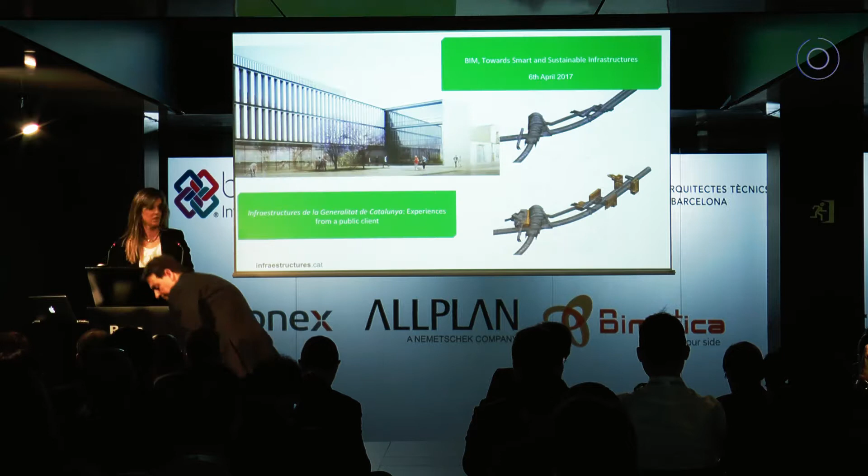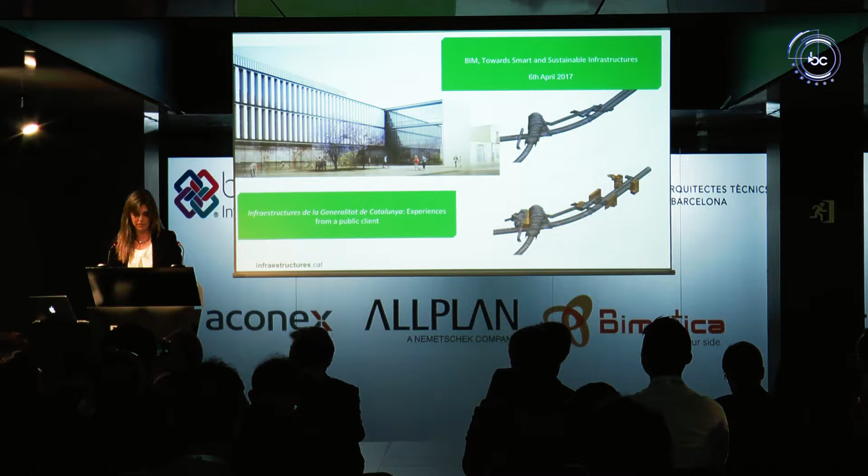From the first stage, when we plan the infrastructure, to the last one, when these infrastructures are handed over. For this reason, in the last years, we have started to investigate and study all kinds of collaborative methods to introduce in our daily management.

Before starting, I would like to tell you more about Infraestructuras and what we do. It's important to understand how we want to introduce BIM in our company.

Infraestructuras is a public company created in 1990, depending on the government of Catalonia. We are responsible for the planning, building, preserving, maintaining, and operating all kinds of infrastructures and buildings.

This is why we are involved in the whole process, from the planning to the maintenance of these infrastructures. In order to achieve our mission, we need to be connected with the needs of society and also with the needs of most of the ministries.

Infraestructuras depends on the Ministry of Territory. However, we also work with other ministries. We focus on civil works, engineering, and infrastructures.

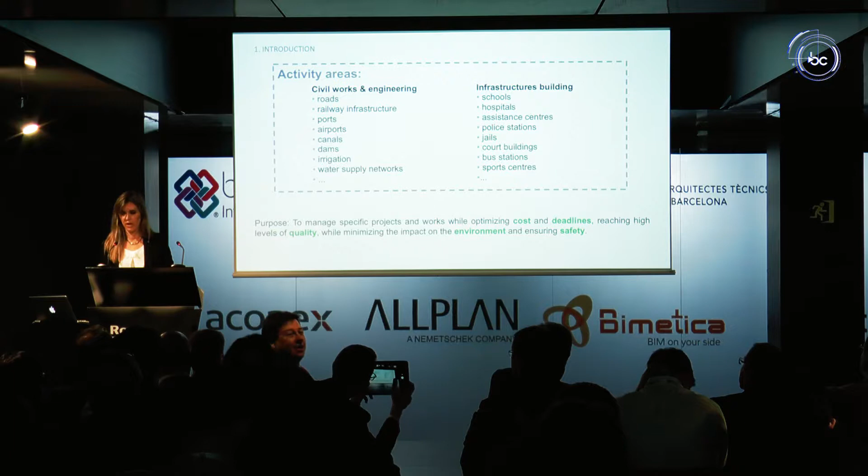Our purpose as a public company is to manage specific projects and works while optimizing costs and deadlines, reaching high levels of quality while minimizing the impact on the environment.

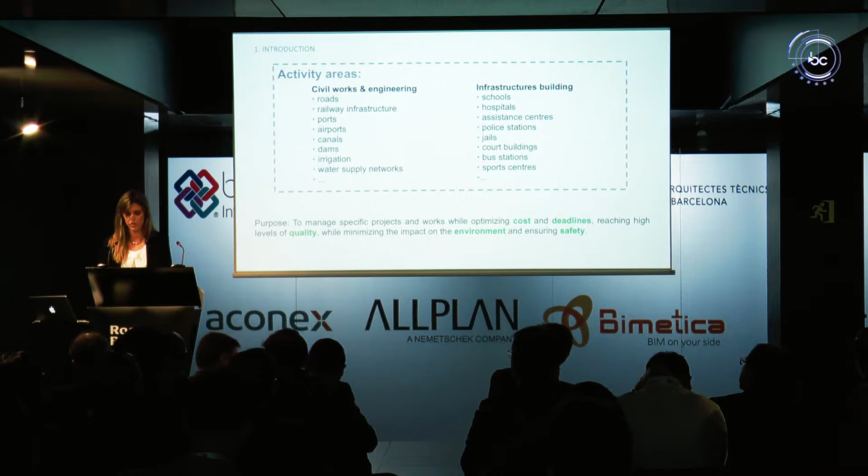And this is why Infraestructuras, for this purpose, decided to start introducing the BIM methodology 4 years ago. The main reasons why we wanted to introduce BIM in our company are the following.

Summarizing, we want to have the best information to plan, design, build, and maintain better works in a quicker and cheaper way.

But it's important now, where are we nowadays? In his speech, the territory minister already explained a little bit the first part, but I want to repeat

the key points. Last May, the government of Catalonia approved a governmental agreement in order to create a commission to introduce BIM methodology in public works.

The first challenge of this commission is to develop a white paper that establishes the global strategy in BIM for the government. This report has been commissioned to Construim el Futur.

Construim el Futur is a group formed by more than 40 company organizations that deal with the BIM implementation in Catalonia. Infraestructuras, my company, also belongs to this commission, as well as Construim el Futur.

My company's first great test experience started in 2013 with this school. It was our first test trial in design and later on in building.

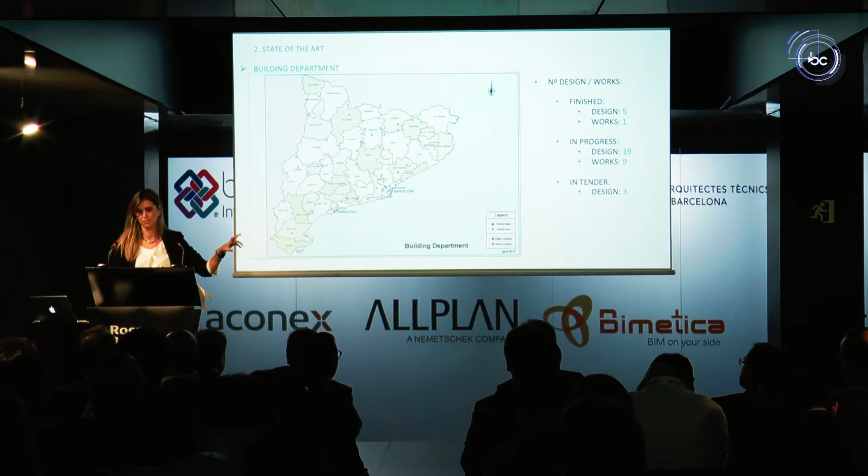I separate the building department from the civil work department because the stages are different in both departments. This slide shows the state of the art of the building department.

The building department has executed more than 5 designs and 1 work, and they are executing nowadays 19 designs and 9 works using BIM.

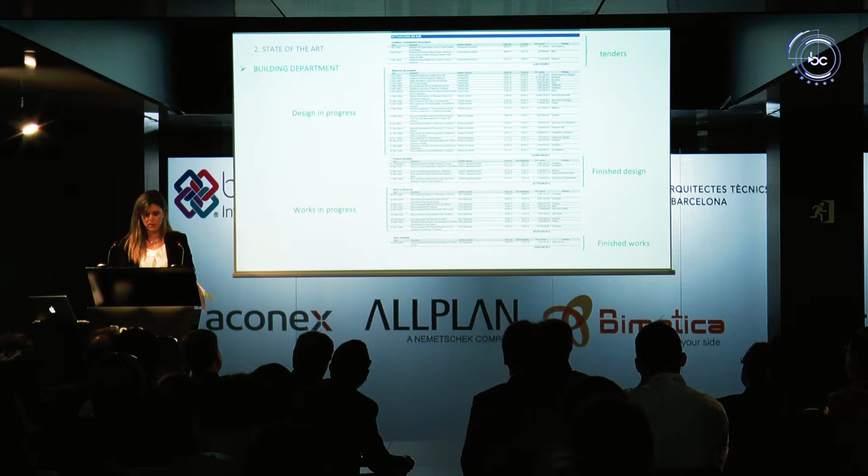We have established, based on all this experience, the first requirements. We drafted new tender documents. We suggested the main objectives and uses for BIM, and also provided a basic codification and basic rules for modeling with revision guidelines.

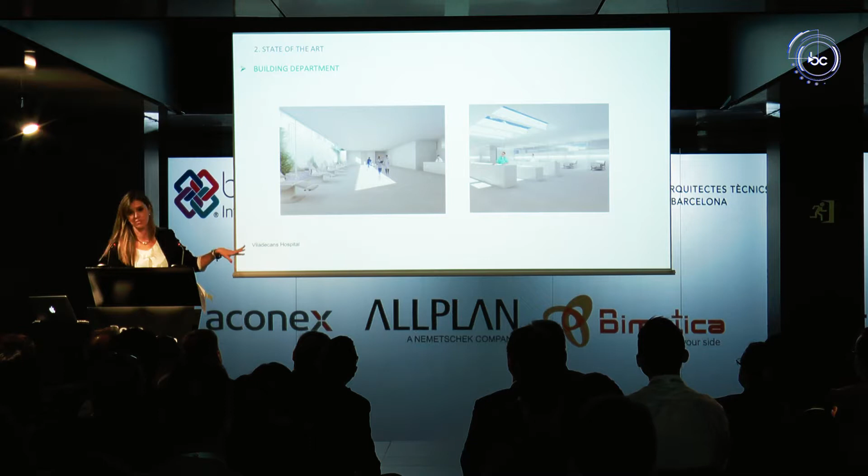I want to show some images in these slides of all these projects and works that we are doing nowadays in BIM. There are assistance centers, 2 assistance centers.

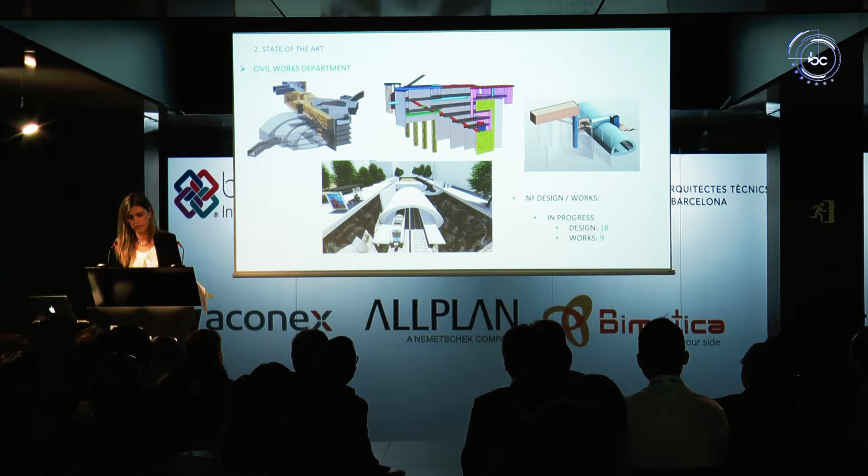And in the Civil Works department, we are executing nowadays 18 designs and 9 works using BIM. The problem is that with all this experience, a difficult point has been revealed that we have learned until now.

Thanks to the large number of experiences during these years, our building department has been able to extract different evaluations, both qualitative and quantitative, from the pilot trials.

In design, we were able to visualize the model as a real object, anticipate making decisions, improve coordination with all the project parties, obtain statistical data, and improve energy efficiency.

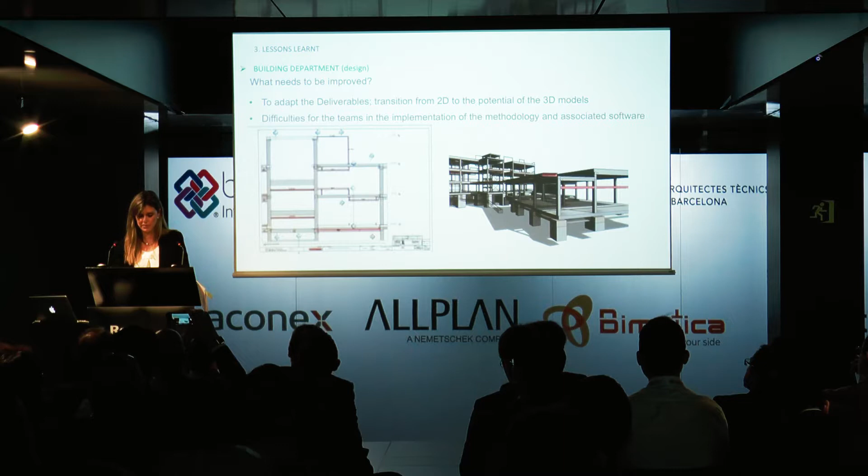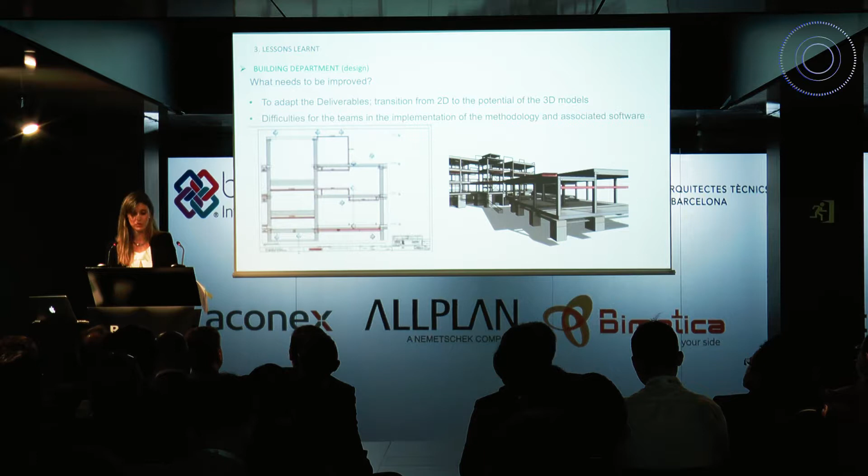However, the most remarkable difficulty has been adapting the transition from 2D to 3D modeling, and also we have problems with the teams because they are not using the same software.

Lessons learned in the civil works department are rather generic, since the experience in design and construction is limited, but we could summarize them in the following statements. The sector is starting to request BIM without knowing exactly why they want it. There is a tendency to order BIM for no reason.

The state of maturity in civil engineering is lower than in building. Perhaps in some cases software is not sufficiently evolved.

The types of actions in civil engineering are numerous. For this reason, it's important to establish a plan of implementation based on real experience and identifying different typologies of works.

I just explained where we are nowadays, but it's important to ask the question, and now I would like to define the future general works line in building. The building department is working nowadays in works and design, but the ideal situation would be to award the design and construction together in order not to lose information.

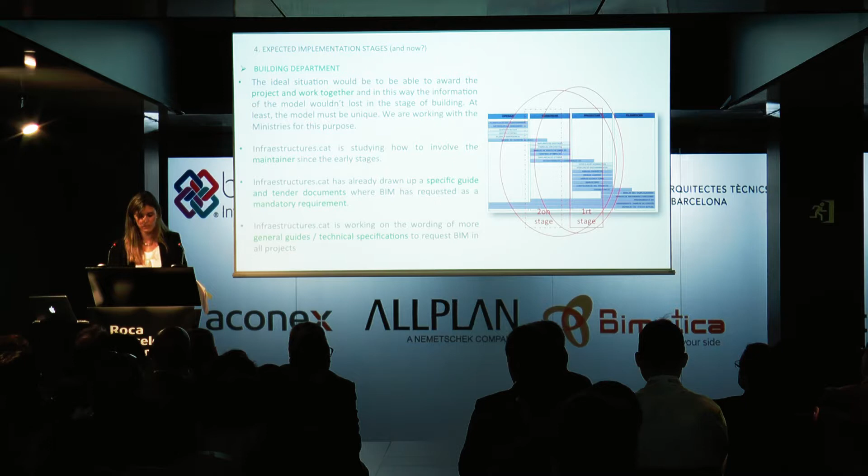For at least, the important thing is to have a unique BIM model. We are working with the ministries for this purpose. The Department of Building is studying how to involve the operator since the earliest stages, and we have already drawn up specific tender documents where BIM is requested as mandatory. Last week we approved the first tender documents where BIM is requested as mandatory.

The path for the civil works department to converge with the building department is long. To do so, a detailed planning was made to achieve the same level in both departments within one year. The planning is divided into 4 stages during that year.

Nowadays, we have completely finished the first stage. The first one is initial workshops and preparations, and we are in progress with the second one, the pilot test. This is only for civil works.

This part is completely finished. In the first stage, we initially defined the goals. We also prepared our employees to review and follow BIM models. We divided the training into 3 parts. The first part is management training. It's not necessary to be a modeler to understand BIM.

The second part of our training is with visualization software, and the last part is modelization software training for some of our employees. Afterwards, we decided the designs and works to be used for the pilot test. I think the main goal in civil works is to have diverse typologies of works and to test different uses of BIM, from geometry and clash detection to facilities, maintenance, and planning.

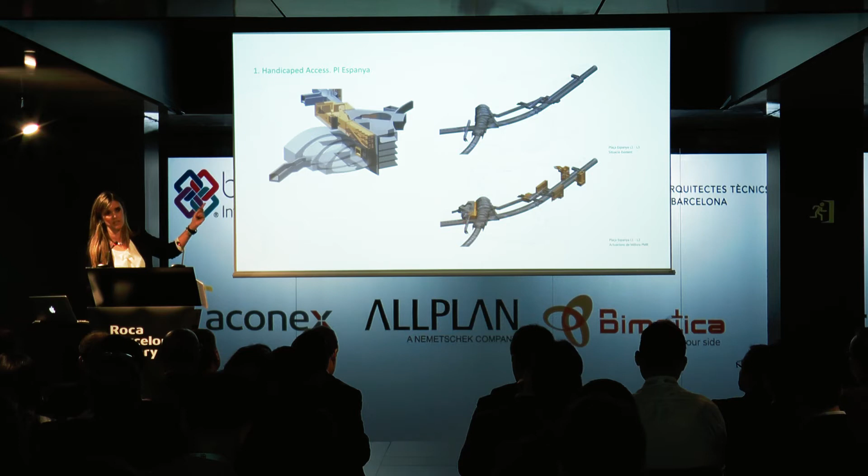I'll pass through some experience quickly. This is for the first typology. This is a handicapped access here in Barcelona. This is a station, and this one is for only one elevator for handicapped people.

Okay, and now in the next phase, we are here nowadays. We decided on the pilot test, and we started the meetings to define different points. We must define the teams, roles, responsibilities, the definition of stages, pilot tests and work schedules, definition of roles, and definition of a common workspace. Those documents will be part of the BIM Execution Plan to be defined once the pilot tests are developed.

During the pilot test, several meetings will be held to analyze the intermediate results and obtain the corresponding conclusions. Finally, during the implementation and plan stage, the previous stage will be validated.

We will also revise the training system, the visualization system, software, collaborative technology, and data exchange between models. Most importantly, we'll be defining the BEP documents to be included in the tender documents, considering the results of past experiences. We will also define quality supervision checklist sheets to be filled in for all the BIM models.

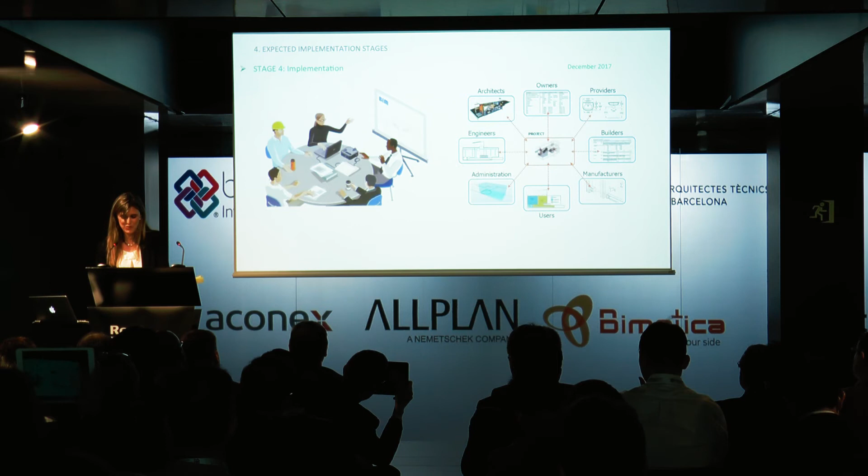By the end of this year, we expect to implement BIM in design and works for civil projects. We know it is an ambitious plan regarding goals and time, but we are sure that next year we will be able to explain the results.

And finally, the main conclusions of my presentation are these: we have already come a long way in the introduction of the BIM methodology in our projects. However, there is still a long way to go. In fact, our strategy is a top-down strategy, from the government to the private sector.

We want to pull the whole sector to commit to the BIM methodology. We haven't waited for the industry to completely adopt the BIM methodology to start requesting BIM in our tenders.

It is important to define what we want BIM for. It's not a good thing to request BIM for no reason. As a tender agency, we need to define standard manuals and guidelines to require the real information that we need in order to achieve our goals and objectives.

We also need to produce documents on how to use and work with collaborative technologies. For this, I want to remark that last week we awarded our first tender where we requested, as a mandatory point, the use of BIM. I think this is the key point of my presentation.

As a public company and a country, we need to work together with all the other public companies, civil society, and private companies to join forces. In this way, we participate in all the commissions and committees existing nowadays. We also collaborate with private companies, introducing collaborative methodologies in several of our projects.

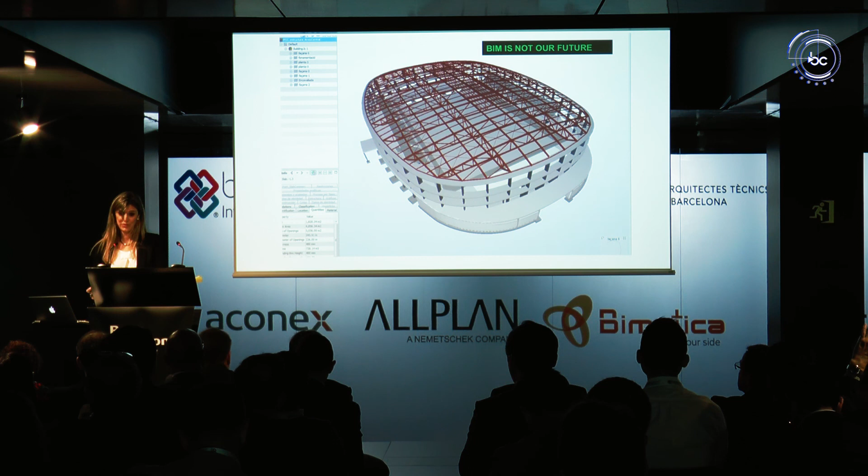There is no doubt that we have already overcome change reluctance. We know we need to change, and we have already started. BIM is not the future. Actually, it is our present.